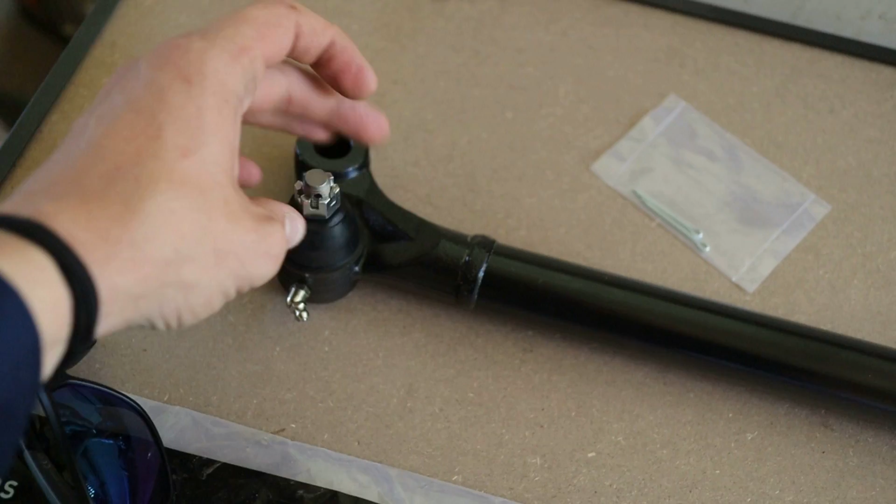So first up, I'm gonna chuck the front of the car up and take the wheels off. Actually, before we do that, I'm gonna give you guys a look at the new drag link. So this here is the new drag link. These are supposed to be rotate only ball joints, which will be fantastic. They are greasable as well, which is also fantastic. It's supposed to be heavy duty.

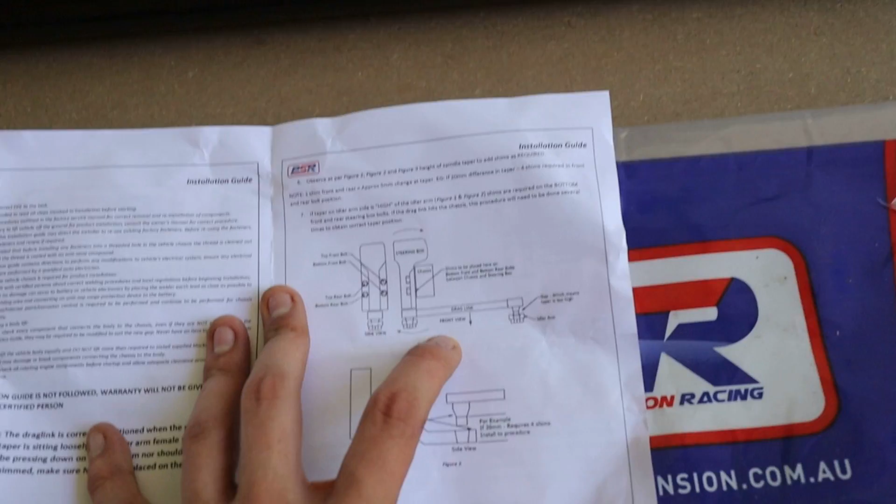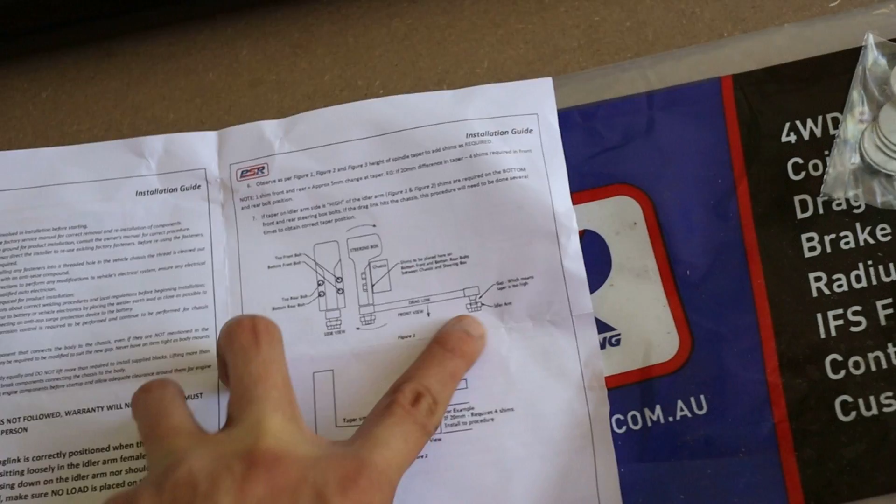Comes with these shims to correct the drag link angle if it's wrong. That I'm aware of, this is the only kit that actually comes with the steering box correction shims, although it really wouldn't be hard to find something similar. But the instructions are actually pretty straightforward. Again, those shims are to correct the angle of the drag link at the steering box. So use that to angle it whichever way you need to. And yeah, let's get that underway now. No one cares for the time lapse, so I'm just going to jack the car up. I'll see you in 1 second.

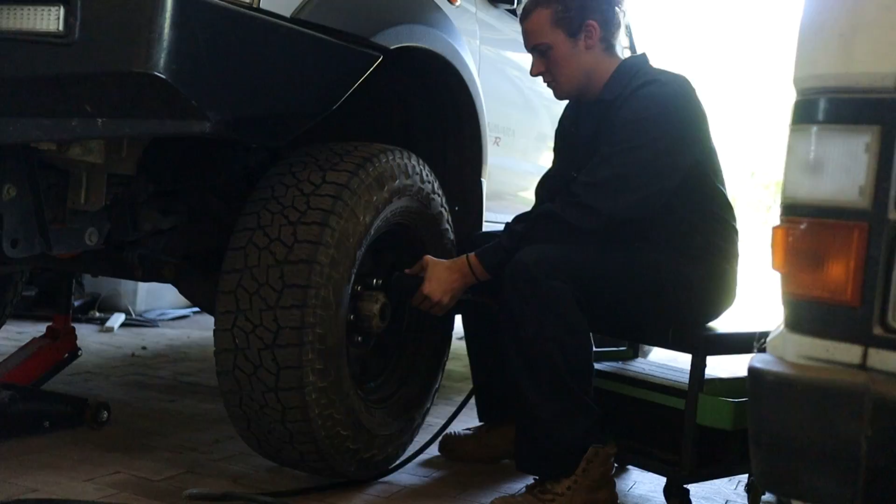So straight up, there should be a little safety pin in these holes on the top side, and a crown nut on these 2 top sides, both right and left, driver passenger. There'll also just be a little nut you want to undo under here. And now this is the fun part where you need to keep your hands out of the way. We're going to get a ball joint splitter to try and split these apart.

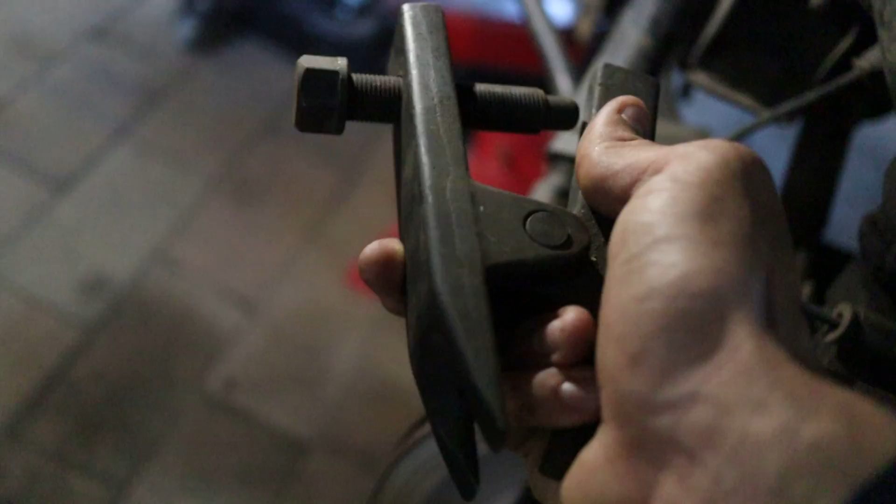You can try just smacking them with a hammer and see if they do just come loose. If they do, half your luck. If you can, just get a hammer, give them a couple of good taps, see if they pop out. But otherwise, you can use one of these if you need. So just to start, a couple of gentle tappy taps. Oh, see, you can see that one's starting to move.

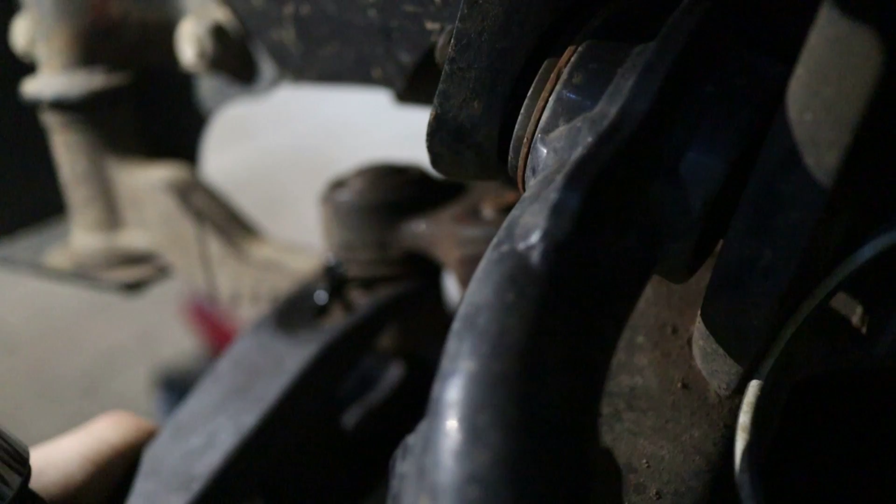That was pretty tame. That was really tame, actually. There's a lot of light here. That was really tame compared to what it was last time. That's an absolute win. We're going to keep moving forward. I'm going to take the old drag link out. Everything is shit. The steering damper.

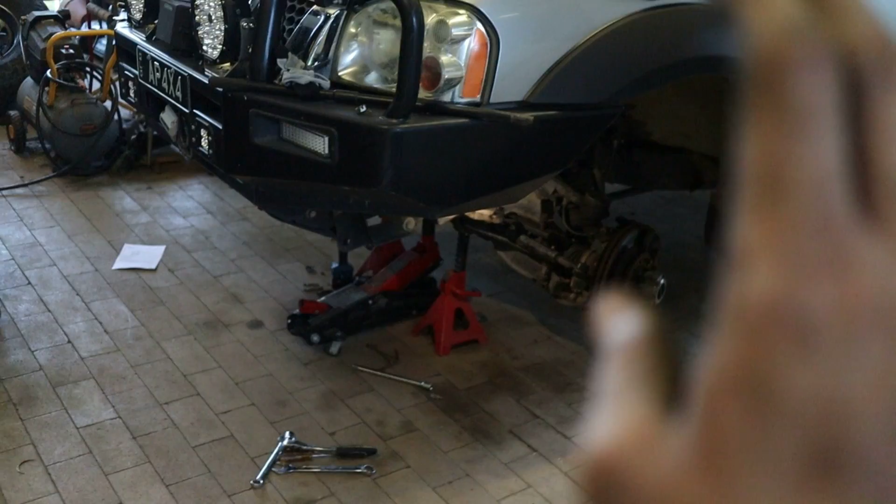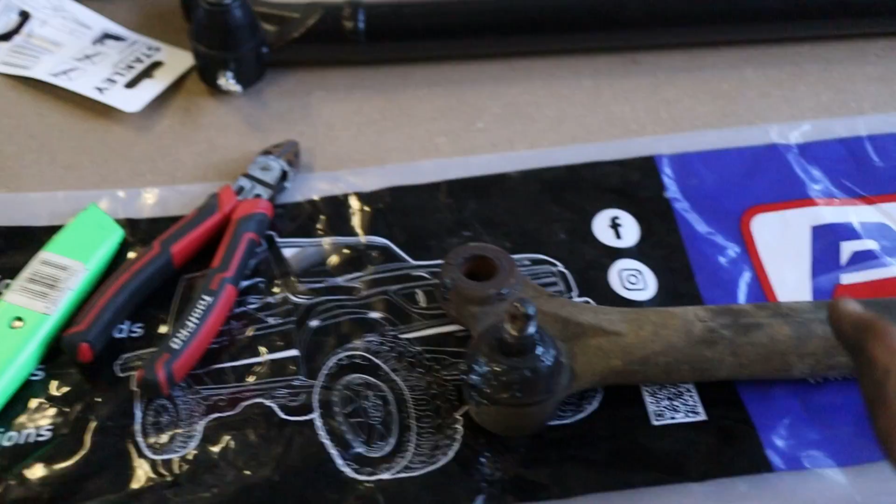Alright, so the steering damper is not an issue at all. I've just undone the 4 bolts on the U-clamp because the one that was attached to the chassis is actually threaded, so love that for me. But, super simple to do. This has actually come out really easy this time, which is lovely. As you can see, there's not really a lot of difference between them. I guess the difference is in the ball joint here and the fact that you get the...

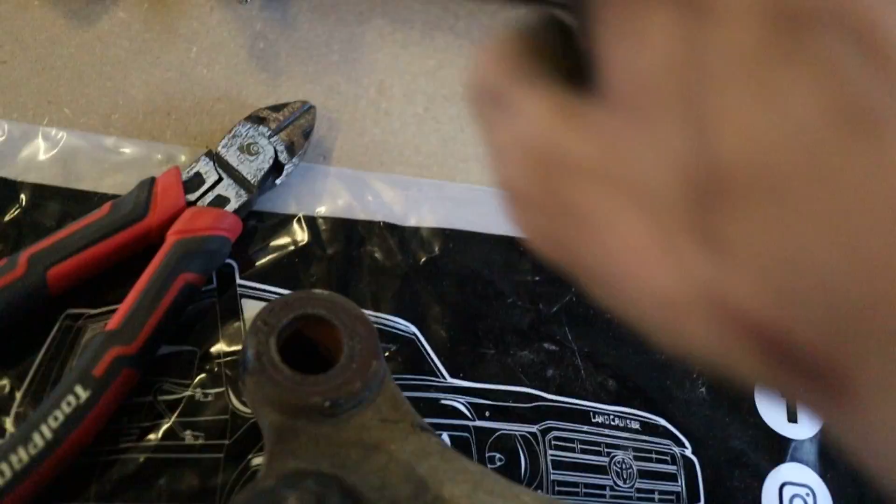Where have my shims gone? There. And you get the shims with them. And these are also greasable, which is excellent too. But realistically, there's not a lot of difference between them. It is a fraction smaller. It should actually be easier to get those U-bolts for the steering damper onto that one.

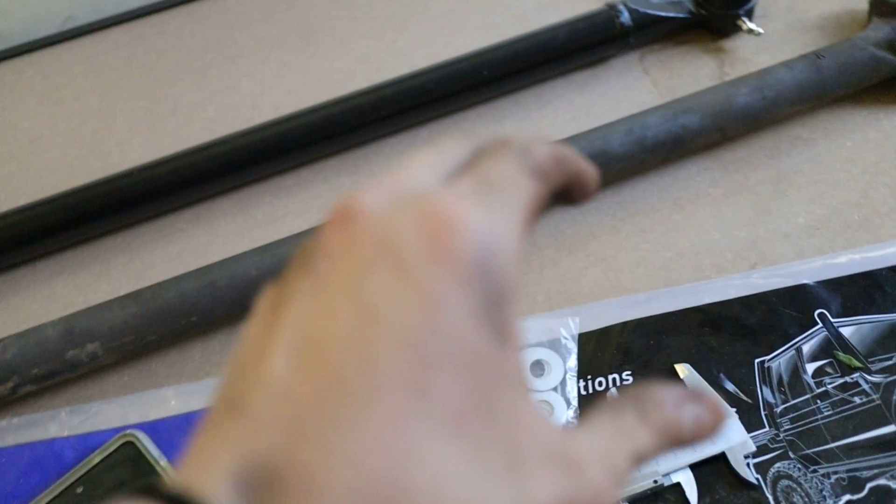So I've just had a quick read of the instructions. First up, we are going to put the drag link in place. We're not going to tighten everything up too much, we're going to get it relatively tight. Then we're going to assess how angled the drag link actually sits, if it's sitting passenger side up or passenger side down.

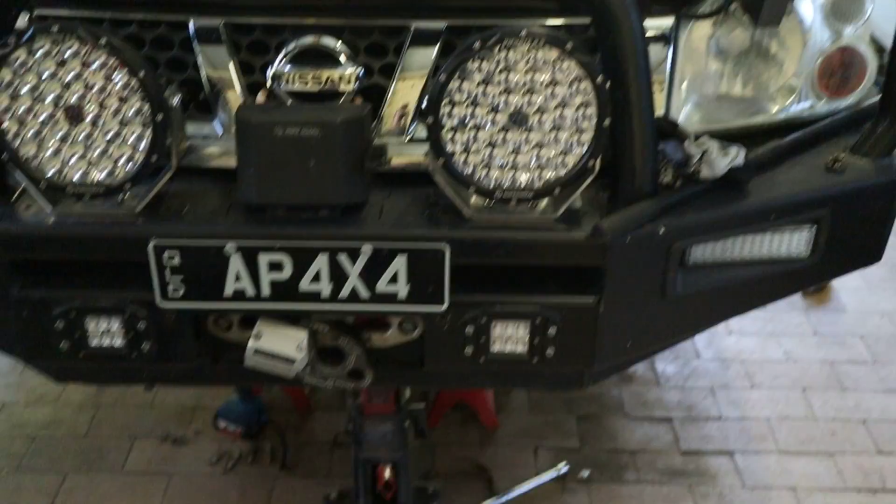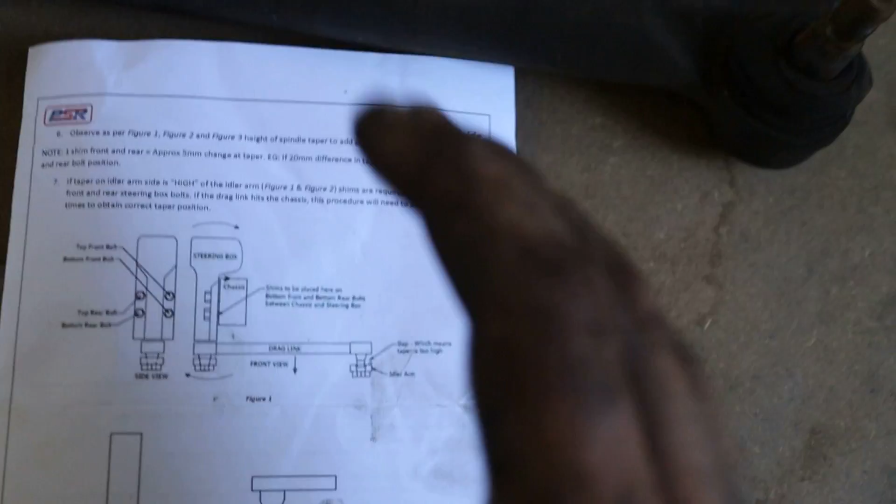So everything's just been mocked up, everything's kind of in. I can see very quickly this is the nut that's going to catch on the chassis rails that makes clicking noises. So these here are the instructions for it. Now obviously if you space out the bottom section, it's going to angle it out, hence bringing the whole right angle of it down, if that makes sense. Holy dooly, look at my hands.

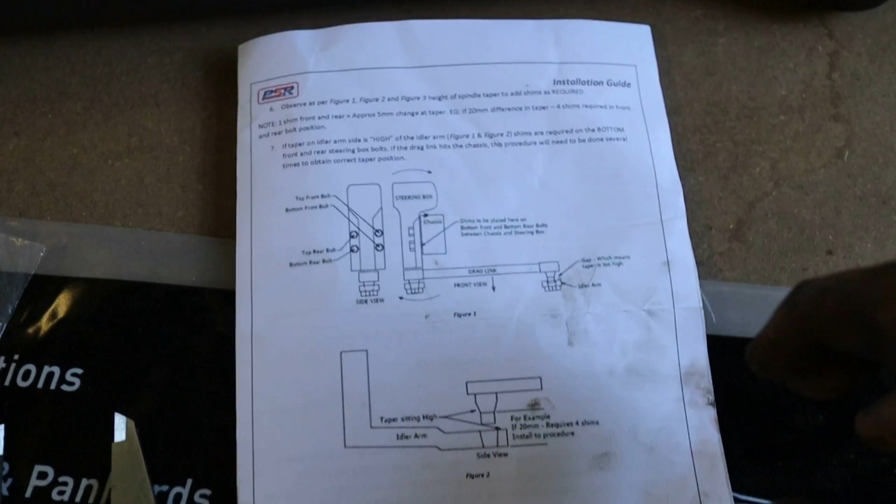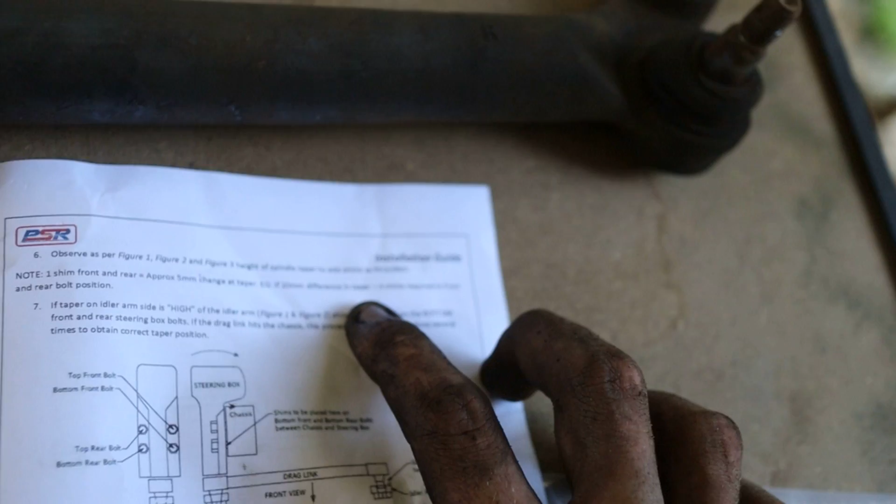Obviously if it was the other way around, you would want to put shims in the top section. Calculation: 20mm difference is 4 shims required in the front and rear bolt position. That's actually quite a lot of shims. Alright, well, time to measure that.

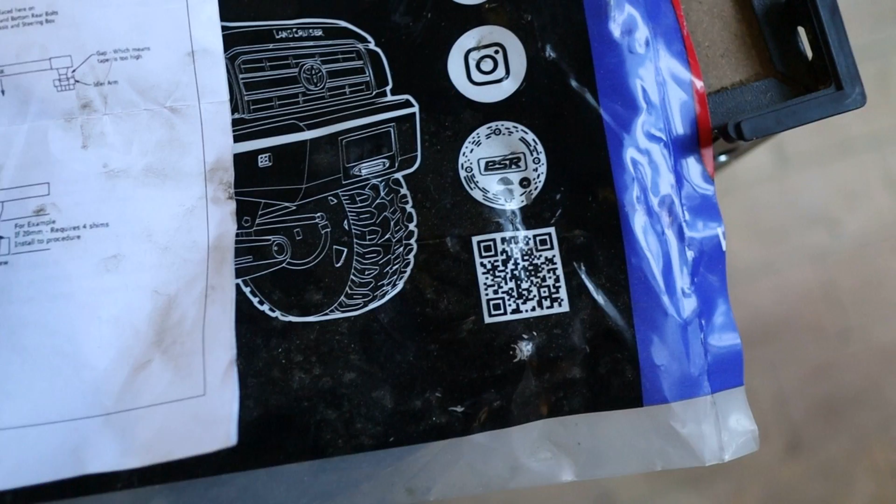So just looking at mine, I think I'm going to put 2 shims in on the lower side. It seems that each shim gives about 5mm on the other side, so that should bring it down a whole centimetre, or 10mm if you will, by putting these on the bottom rear bolt and the bottom front bolt.

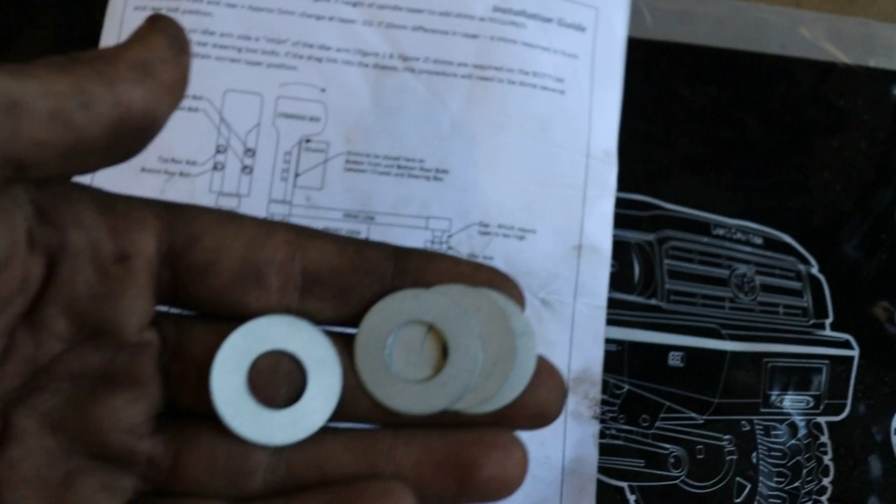Now this is something that can be toyed with as well if you need to go back and try it again, if you want to put more correction in or less correction in, just keep taking stuff in and out. Keep these handy as well in case you ever do need to muck around with them.

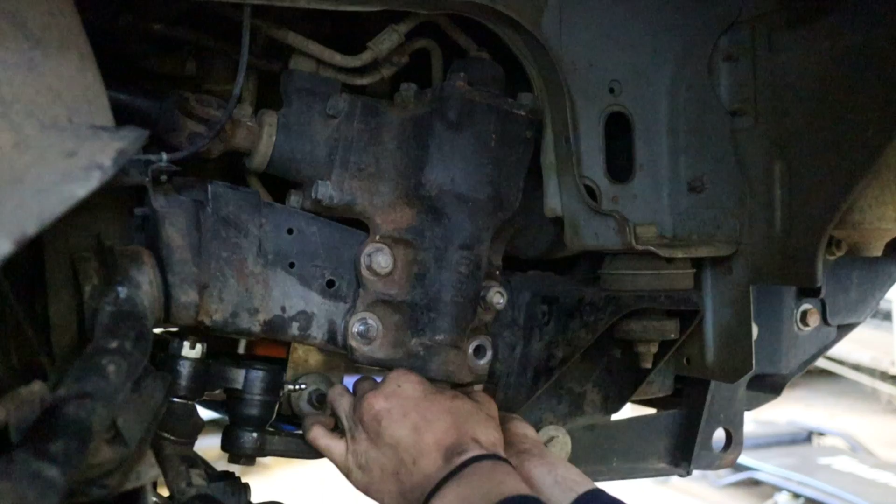Okay, so once you're done all that, it is literally just as simple as tightening everything up. Put your castle nuts and whatnot back on. Make sure you put the safety pins through there as well so that they don't come off. But other than that, it's literally just bolts up.

If I can make a recommendation, when you're trying to get the drag link in and positioned, try to drop both the threads in at the same time. Otherwise, it can be very hard to align them and get them both to go in if you're trying to do one end and then the other. Seriously, just align both of them and drop them in at the same time. Saves a lot of hassle.

Now, as I mentioned before, there are mozzies everywhere here. I'm getting eaten alive.

As I mentioned before, these are greasable, so use the grease nipples, grease them, just do it. It'll extend the life on them. Also, be aware that you'll most likely need to do a wheel alignment after this. I'd be surprised if you didn't.

I'm booked in for tomorrow morning down at Tyre Power, so Mick has us booked in down there. That'll be perfect, but just be aware that you are probably going to need a wheel alignment after this. Other than that, for me, it's just putting the wheels back on. That's everything done. That is the PSR heavy duty drag link installation. Not as bad as what I remembered. That's a good thing.